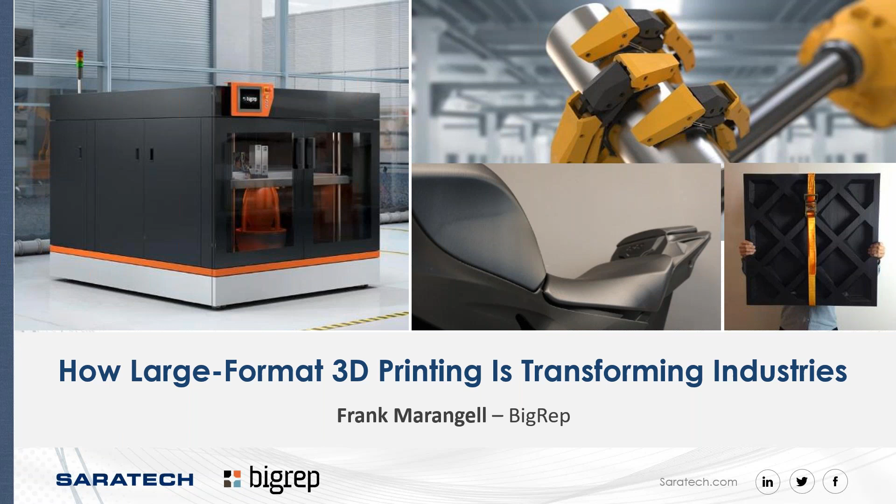Today we have a special guest from BigRep, Mr. Frank Marangell. He will be sharing with us some insights into how companies in various industries are using 3D printing to change the game today. Frank will also highlight a few case studies of customers who use 3D printing to speed up development and cut production costs. There's a lot of cool information to share with you today.

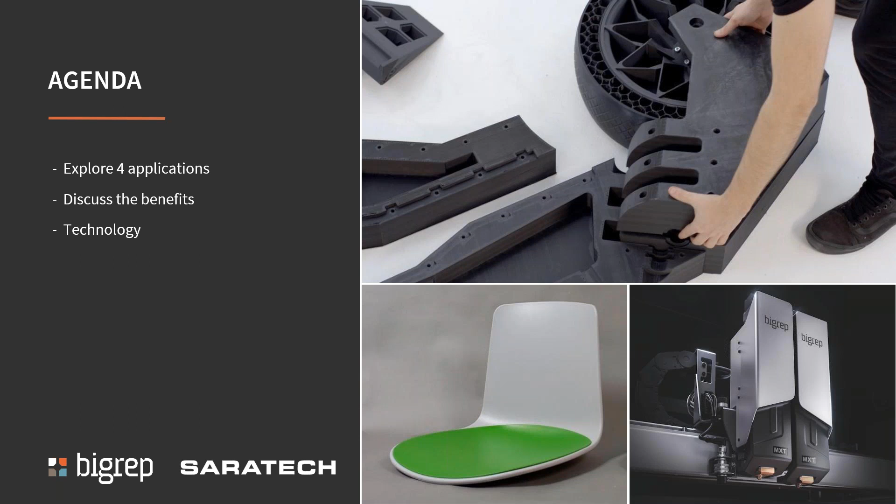On the BigRep agenda, we're going to explore the 4 main applications for large format 3D printing and a few customer use cases for each of those applications and the benefits those customers get out of those use cases. It's really exciting to see how our customers are using large format 3D printing, the BigRep 3D printers. At the end, it's not a sales pitch, but I have a couple slides just for anybody that doesn't know BigRep about some of our most exciting recent technology.

The first thing that is really interesting and what keeps me excited about this industry is that 3D printing is all around us. You can't touch something today that wasn't affected by 3D printing, whether it be the design or the manufacturing of it, or from a safety standpoint, 3D printing is getting into medical and dental. So 3D printing is all around us, and it's a really exciting industry. It's 30 years old, but it really feels like it's just beginning. Some of the applications we'll talk about today really emphasize how it's still growing strong and it's still in its early stages of development. It's very exciting. Next.

I put this slide in just to show that the industry, although 30 years old, has grown, has doubled over the last 5 years from 2014 to 2019, and is expected to double again by the time 2025 comes along. So it's really interesting. Now, if manufacturing takes off in additive, these numbers will even be blown out of the roof. The 3D printing industry is some version of $8 to $12 billion total, and manufacturing is something in the tens of trillions of dollars. So it's really an exponential factor from one to the other. If 3D printing can take a piece of that, it's very exciting.

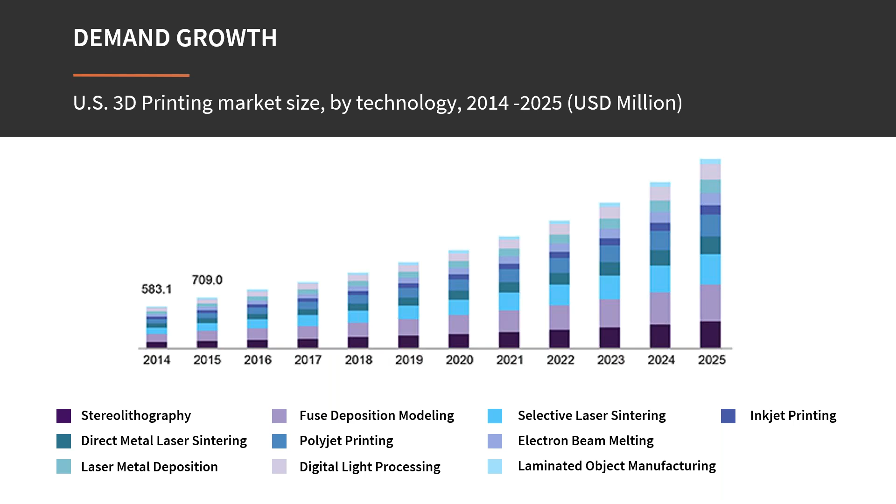One of the questions I get all the time from people that want to get into 3D printing is where do I start? What do I print first? Hopefully this presentation can give you some ideas. If you're in mechanical design, we have some applications in that regard - manufacturing tooling, end-use parts, and if you want to be bold, patterns and molds. We have many applications here, and hopefully this can help you think about different places where 3D printing might fit in your facilities.

The four main applications for large format thermoplastic 3D printing are prototyping, which is 60% of this market, and tooling - manufacturing tooling - which is about another 20%. So 80% of large format 3D printing today is in prototyping and manufacturing tooling.

One of the most exciting growth areas right now is patterns, molds, and castings, and we have an application on that, talking about that marketplace. The real holy grail of this industry, where it's going to grow exponentially, is in end-use parts. Today it's a very small percentage of the total market, but has the potential to be a traditional accepted manufacturing process like molding, milling, casting, forming, and additive manufacturing. You see some applications starting to take off right now, and we have a couple examples. So let's get started.

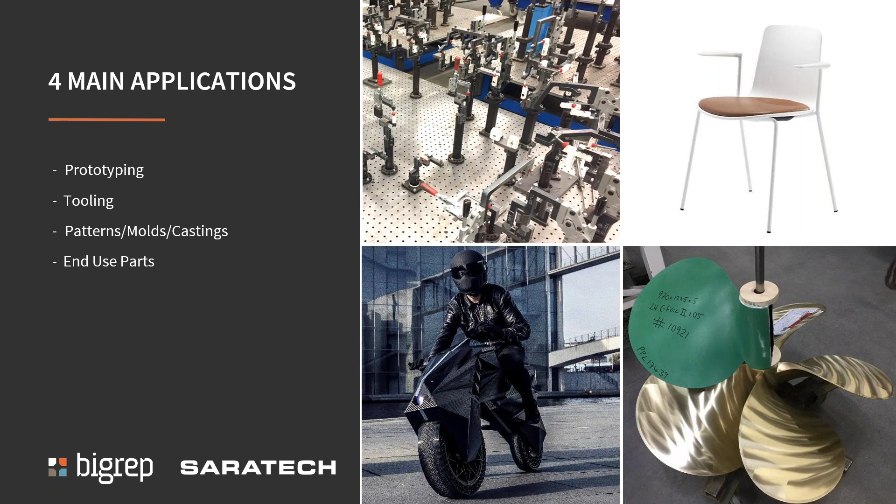The first application is prototyping.

The first thing you have to think about when you want to do prototyping is: what do I want to prototype? What's the size of the part I want to prototype? That's the first calculation to help you decide what machine you might want to use. Then you have to determine: do I want to do concept modeling or functional modeling? Each of those characteristics leads you down a different path - either different systems because of different specifications, or different materials and material properties because of what you want to do with your prototype. Let's look at those three criteria next.

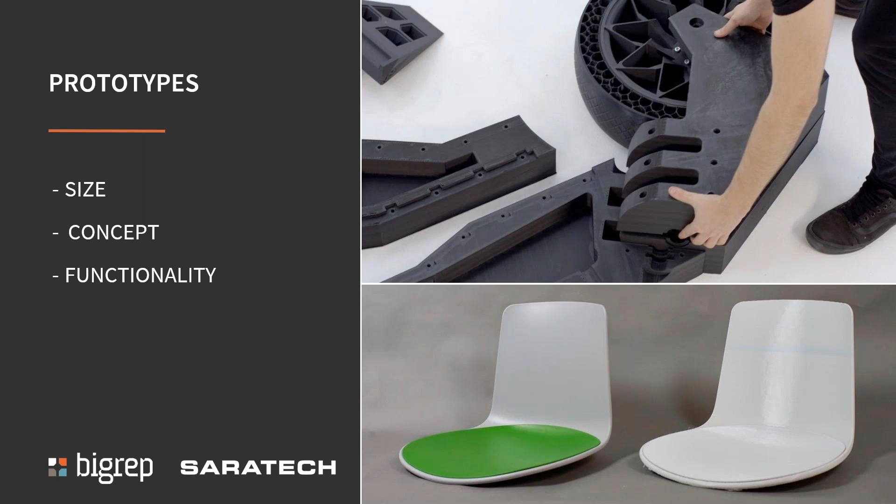The first one was size, and size is important in 3D printing - that's why large scale is really growing, because previously, before companies like BigRep, there wasn't an ability to print at very large scale. So everybody that wanted to make an additive prototype printed it in pieces, meaning they needed to take the CAD data, slice it up, print it in pieces, then glue it together - which caused a great increase in time, but also a reduction of geometric accuracy and physical strength.

With the ability to print the entire piece in one print, you're able to retain your geometric accuracy and make an easier print - you just load it onto the print bed, push print, and you're also able to get full mechanical properties out of the printer.

This particular printer, the orange bed above, is the top view of the BigRep 1. It's one of the first, and has the largest volume of serial production for large-scale 3D printing. There are somewhere near 400 printers in the marketplace of the BigRep 1. Its first generation came out in 2014 - we're now on the third version of the third generation. So it really is our flagship.

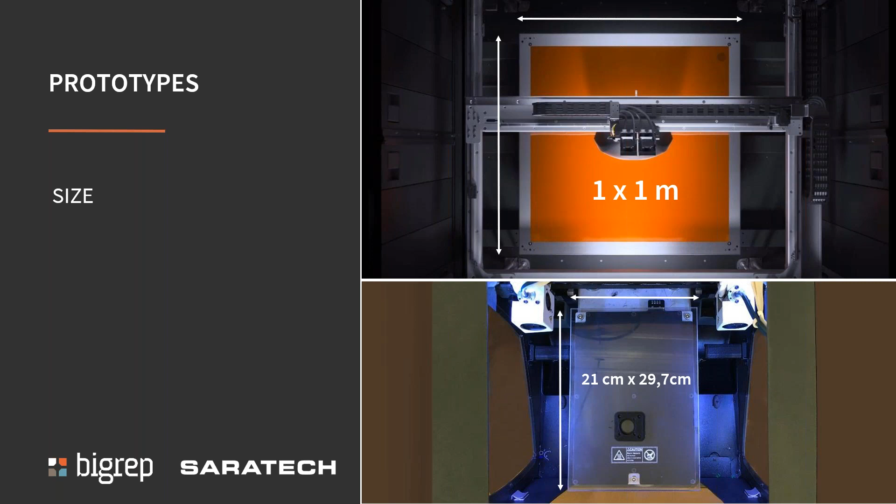The particular bed size we're looking at is 1 meter square and 1 meter in the Z, so it's a print area of 1 meter cubed. Very few things need to be printed larger than that - we do get those, but very rarely. Most times customers are very happy with the 1 meter cube being big enough for everything they want to print.

Then, like I mentioned earlier, you want to decide: do you want to do concept modeling, or do you want to do functional modeling? Both give the benefit of accelerating the product development process. What does that mean? It means you can either get to market faster, or produce and test more iterations - or you can do both, and most companies do both.

You're able to iterate much faster when you have a prototype that comes off and you can test it and say, 'I want to change this' or 'this is not what I expected.' And you also can get to market faster.

If you had to go outside or use traditional technology, you're not able to do that. And both processes reduce costs compared to the more traditional technologies. So that's prototyping with additive manufacturing in general.

Now, if you're doing just concept modeling, you're really just worried about form and fit. So the particular material properties are not important. You care about geometric accuracy, surface finish, form and fit, but you don't really want to use it in a functional way, so you don't worry about the mechanical properties.

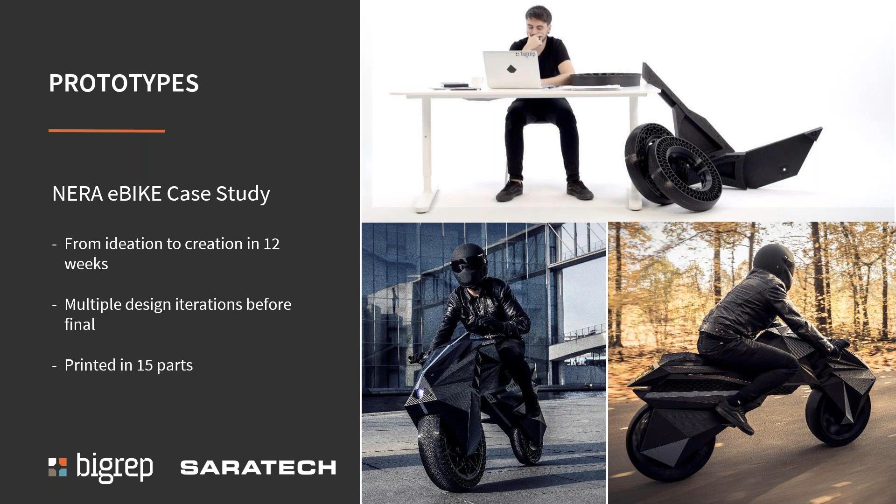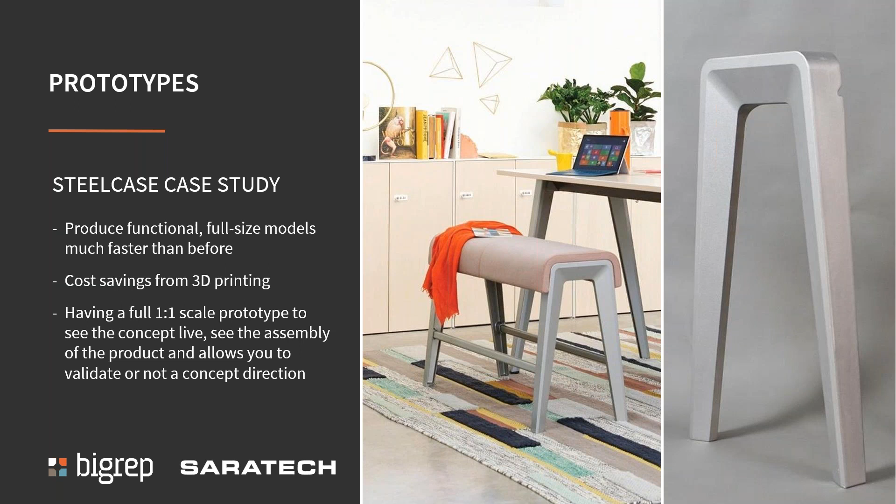And again, when you're the leader, when you're the best, you want to make sure you get to market properly. They actually had such success from their original one that they put a BigRep One in all their manufacturing sites around the world.

And here's a quote that I put into the presentation from Michael Hell, the director of design. I really can't say it better than Michael did. And I think it's indicative of 3D printing in general. So let me read it.

It says, one of the things that's really amazing about BigRep is that you can create full-scale models. It's important because you don't really understand what a piece of furniture means in the real world until you have it in full size. And I think that's true in so many industries. And that's why, as I mentioned, BigRep is growing faster than the marketplace. So thank you for that quote, Michael, and thank you for your customer references.

So that's prototyping. The next application for large format 3D printing is tooling, or as I say, manufacturing tooling. Let's look at a few case studies here. Next.

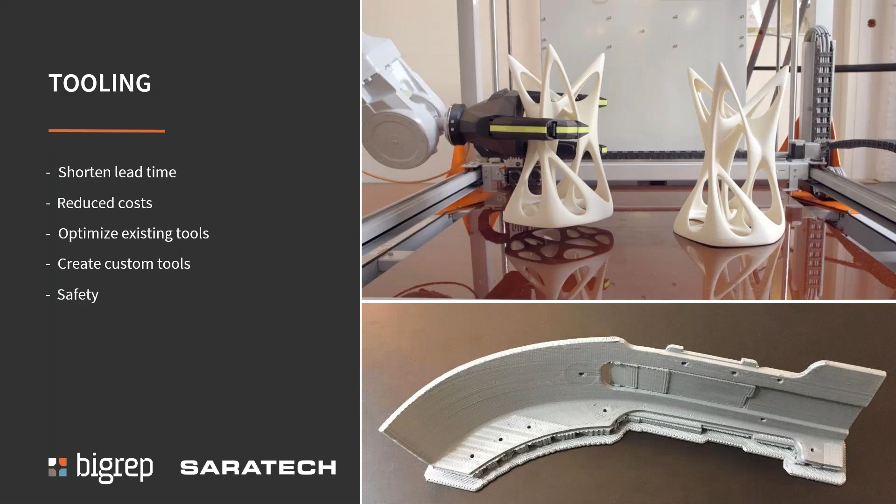Tooling is 20% of the thermoplastic extrusion marketplace, and it's one of the most exciting areas in market applications because customers are coming up with new and exciting tools every day. When a customer buys a system for one application, it's quickly overcome by many applications. That's why many customers buy one machine and within a year or two need to buy a second and third, mostly for tooling.

Tooling allows you to create your production line before you actually have a sample prototype. That used to be a big problem in the marketplace, you needed a prototype before you could start making tools, so you couldn't test your manufacturing line while creating your prototypes. Now, using CAD data to create tools and 3D printing to create jigs, fixtures, and custom trays, you're able to test your manufacturing line during the prototype process, not the main production.

Additive gives you the ability to make a lighter weight tool, so ergonomically it's better, and it allows you to make a higher quality product because of the customization. In areas where you might have had defects before, you can create a manufacturing tool that better aids the manufacturing process to create fewer defects. There's also a definite safety factor - if you need a shield or protection for the operator, you can make a custom shield or tool for that. And from a quality standpoint, you're able to create tools, trays, jigs, and fixtures that allow you to make a higher quality product.

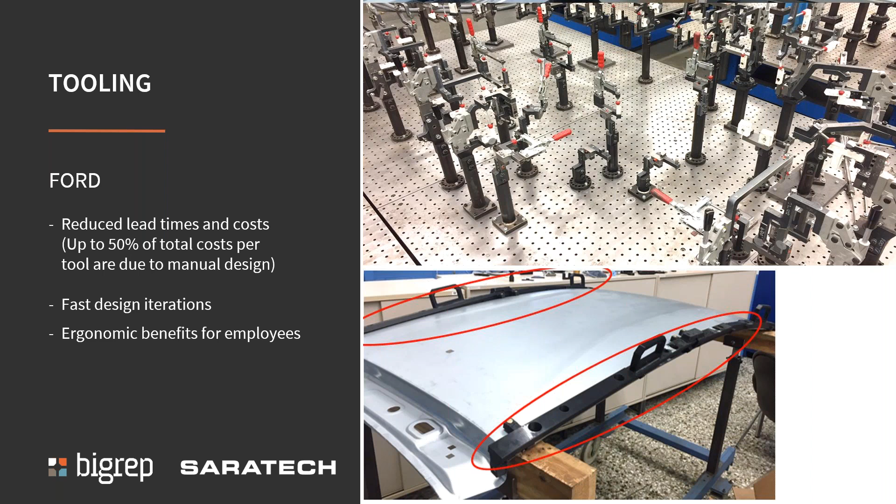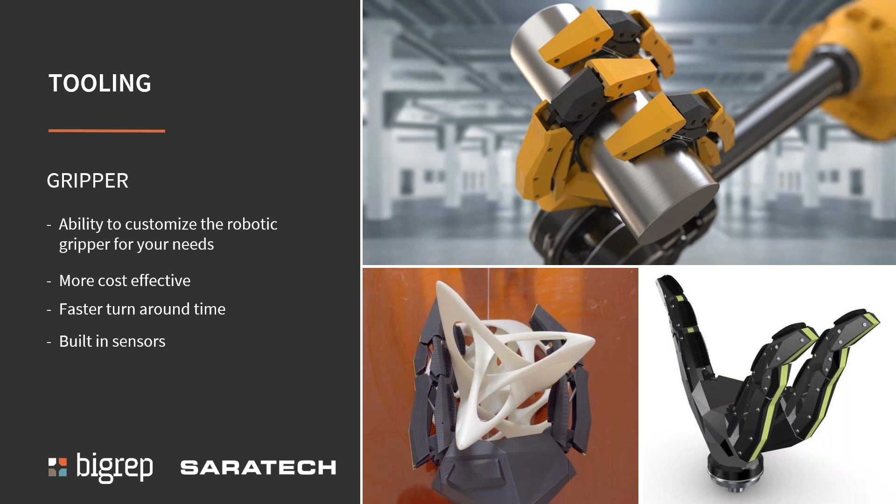This particular one has built-in sensors, so you can add some intelligence to the gripper to allow the robot to feel and sense it. Here's an example of the ABB robot in our facility using one of these sensor grippers, picking up a part off of the BigRep One and placing it. It's a really interesting application if you have any robotics to make a custom gripper.

So the next application for large format 3D printing is patterns, castings, and molds. I put the three together, and let's look at a few of those case studies.

The first thing from the patterns, castings, and molds area—it's an area that hasn't seen as much 3D printing as other applications. It's really interesting when customers come up to us and say, how can 3D printing help me? It reminds me of 3D printing a decade or more ago, when not everybody knew the benefits of 3D printing. Sometimes in the molding or casting business, it feels the same. But as 3D printing did in prototyping previously, the pattern business allows them to shorten the lead time, reduce the cost, and reduce both the labor hours and expertise, as you'll see in some of these applications.

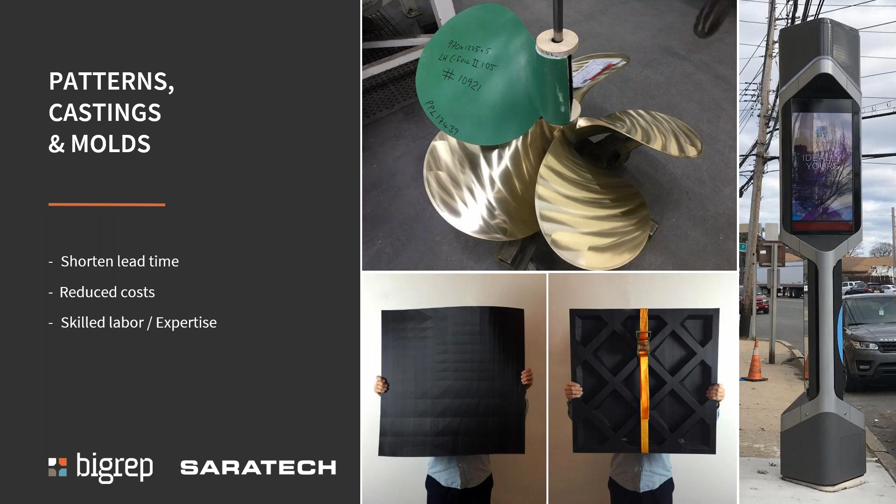The first application is vacuum forming. This is a customer of ours in New York called Boyce Technologies. They were a fixed subtractive company—they have 35 Hurco CNC machines, and a built-in electronic shop with printed circuit boards. Time is of their essence, and they were not convinced they needed additive at all.

But one of the applications they implemented once they bought the BigRep printer is quite interesting—they didn't buy it for the vacuum forming application. This is another area where they saw the benefit of using it in other applications inside their factory floor. Now they make all of their patterns with their BigRep printer, and they're able to print it in a day or a weekend, as compared to several weeks lead time if they went outside, or many more labor hours if they used their CNC machine or other technologies in-house. So it's a big benefit, and now they make all their tools on the BigRep printer.

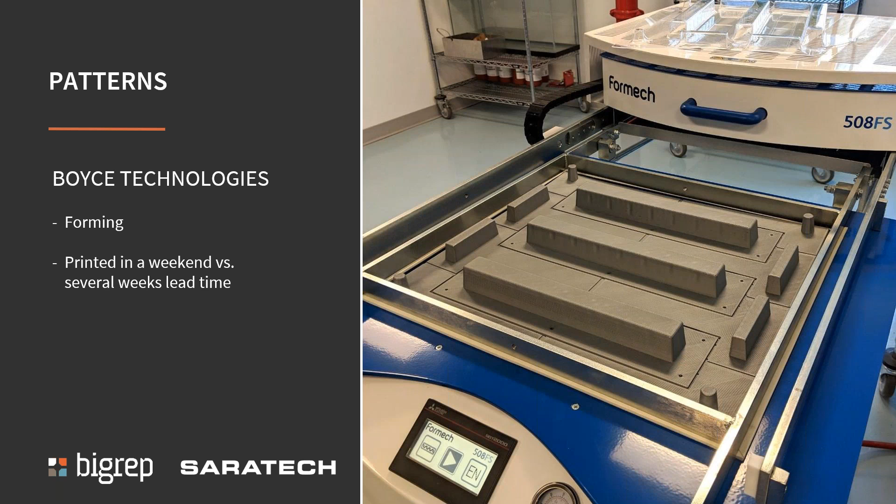A really interesting case study is Teignbridge. They are a propeller manufacturer, as you see here in the pictures, in the UK. They were posed with several problems—probably the biggest is the inability of people to make their patterns. Their pattern became an art form, and their ability to find that type of artist to make these patterns became a real shortage for them. They were almost forced to go offshore, not necessarily because of labor costs, but because of their inability to make their patterns. So they brought in the BigRep printer, and you can see their propellers are quite large.

They were able to print their patterns in 33% less time, and as you look at the next point, a 90% reduction in pattern maker labor. So instead of making it in an old artistic way, they were able to make it digitally, saving 90% of the pattern making time while making it more accurate as well. Probably the biggest benefit is their ability to hire digital engineers to design patterns instead of artists they can no longer find.

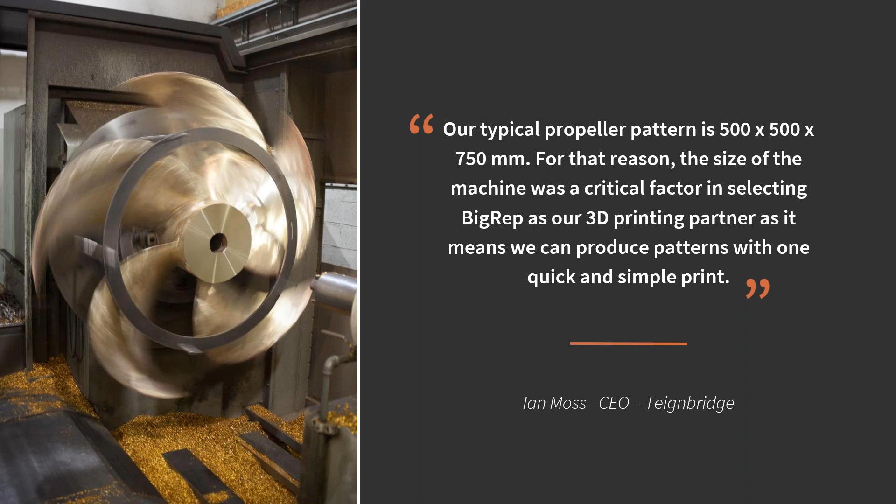So next is patterns, and this is a concrete mold case study by Geiger, also on our website if you want to read more. Geiger had the challenge of renovating a museum, and one of the things they needed to replace were concrete arches that were crumbling. Typically they would make these manually, a very time-consuming process, replacing them often because they were made out of plywood and got destroyed on each mold they poured.

So they decided to go additive and partner with BigRep, who used its partnership with BASF to create the best material for making these concrete molds so they could be used more often—enough strength to support the concrete, but enough release to allow it to be removed and reused. This project created a 50% cost savings over their alternate technology, 45% shorter production time, and really reduced resources all along.

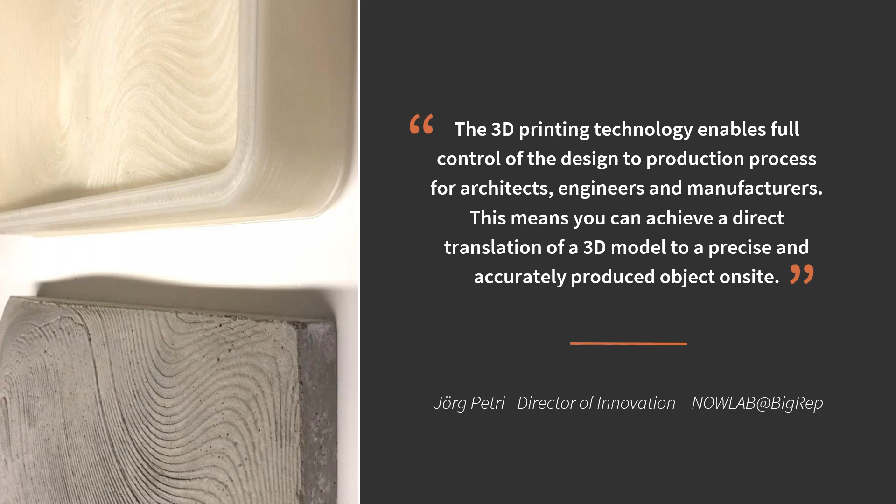What he said, which is true in many other applications, is that 3D printing allows full control of the design-to-production process. In this case, architects, engineers, and manufacturers achieve a direct translation of a 3D model to a precise and accurate produced object on site. That's true in so many applications, as I mentioned with the Steelcase quote. The flexibility of additive, especially large format additive, goes from prototyping to concrete molds. Quite interesting. Next.

Now the most exciting future potential—everybody's been talking about end-use parts for additive, and now you're actually hearing about applications for end-use parts usage. I'll show you a couple here, but it's really interesting. As I mentioned earlier, if end-use parts becomes a legitimate alternative to molding, casting, and forming—additive as a real alternative—our industry is going to grow rapidly, and manufacturing is going to have a lot more flexibility.

So end-use parts, like every other use of additive, allow for customization, help you deal with small and large batch sizes, and allow you to manufacture near the customer. You can design it in one place and manufacture it anywhere in the world—very interesting. There's much less material waste than in a lot of manufacturing processes. If you think about this part printed on our BigRep Studio, and you think about milling that instead, you're probably milling away 80% of the material. So it's really a waste. For all those reasons, end-use parts are really interesting.

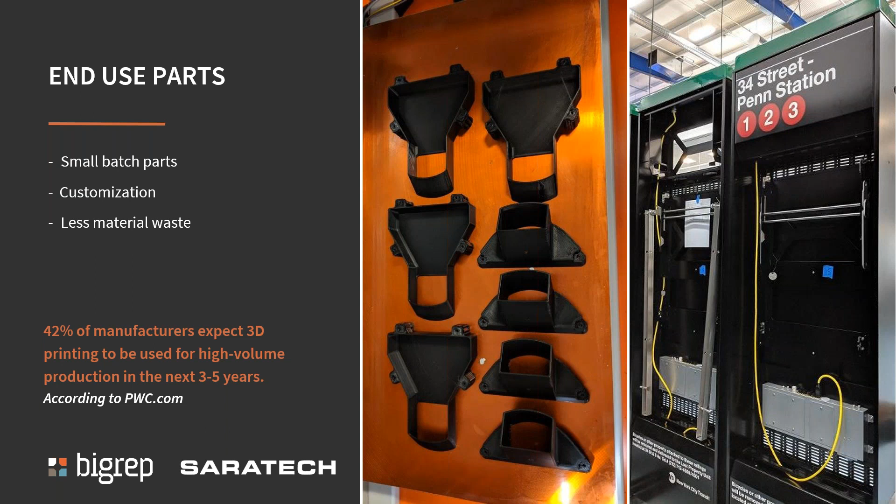I put this quote from PricewaterhouseCoopers in there because it's a very aggressive quote, and we'd be really excited if it became a reality: 42% of manufacturers expect 3D printing to be used for high volume production in the next 3 to 5 years. I do believe 42% of manufacturers will be using 3D printers or more for production volume. The question is how much high volume, and some new technology I'll present will help that process along, making the traditional-versus-additive decision a little easier. So wait for that. Next.

Back to Boyce Technologies for a second. As I mentioned, Boyce is a multi-million-dollar facility. They actually bought the printer for prototyping, then found that these parts were withstanding the criteria needed for an end-use part. So rather than using them just for prototyping, they ended up using them for real end-use parts. Boyce really sells time—being able to make an end-use part without having to design it, prototype it, and go out for tooling saves on the real cost of time, which is even more than the cost of the tool. Their ability to save time by using additive lets them take on a lot of projects, mostly for the communication industry. You'll see their kiosks and displays all around New York City and many major cities, and some of those have BigRep parts in them for real end-use parts.

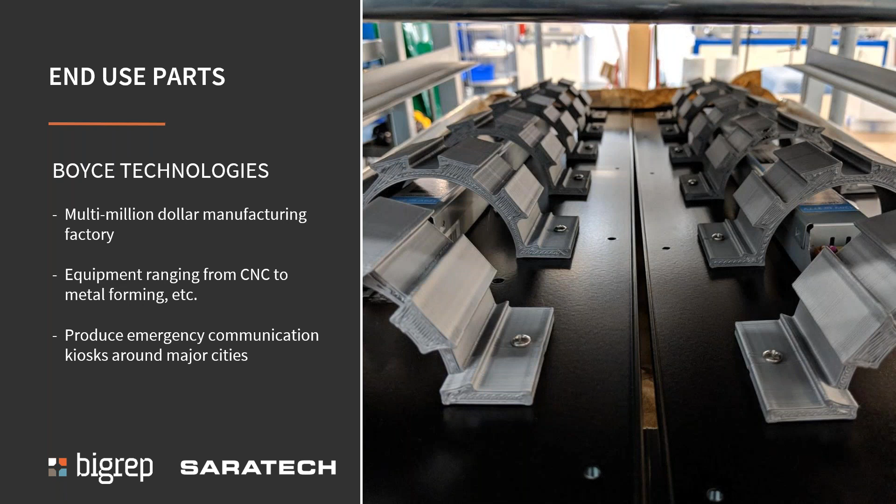It's just interesting to see how Boyce really is using additive in an end-use part application, and really saving them time and money. It really came to me that there's going to be a race for this end-use part marketplace, and I'm not sure if it's going to be the Fords of the world and the large manufacturers.

We have a partnership with Etihad Airways, and they want to print 50% of their cabin interior by the year 2025. That's a really aggressive challenge, and we're up for the partnership and challenge with them - Ford Motor Company and some of their challenges - or it's the Boyce Technology of the world that are already using it for end-use parts today.

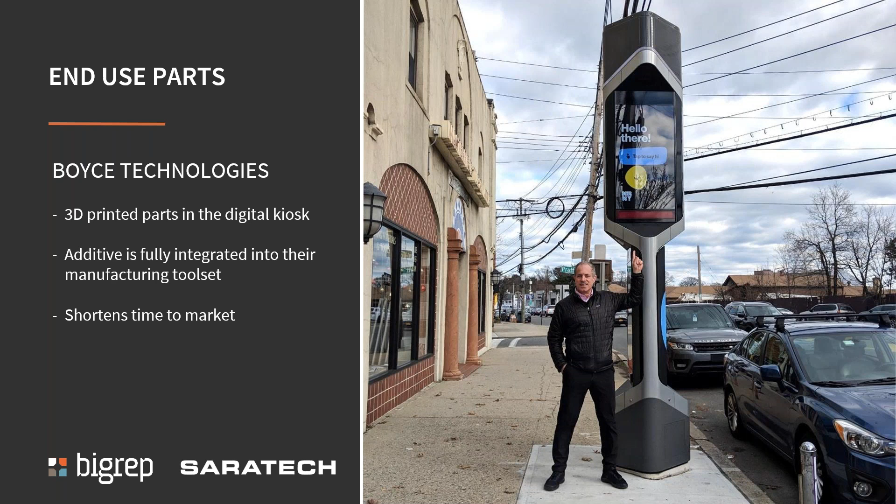There are thousands and thousands of Boyce Technologies wherever you are in the world. You might be one of them, ready to implement additive for real end-use parts. And if you are, and if it's large format thermoplastic extrusion, please give us a call. That's my sales pitch. Next.

So it's really a question of now looking at those applications - prototyping, tooling, patterns, castings, molds, end-use parts. What application do you want to redefine? And if you look at the slogan behind me, BigRep - one of our brand messages is to redefine additive, and we hope we can help you redefine additive.

Let us know if any of those applications, or if we can solve an application for you. I don't know who's on the line, it's really interesting, but I don't know how much you know about BigRep. So I just have a few slides that talk about BigRep Technology, not BigRep as a company.

Came out in 2014. In 2017, we introduced the Studio - it's our little guy, as we talk about it. It is 1 meter by half a meter by half a meter, and it fits in a lot of applications and places in the factory. It's quite silent, so it fits in an office environment as well. So really a nice form factor, both in printing area and size, for people who don't need the BigRep One.

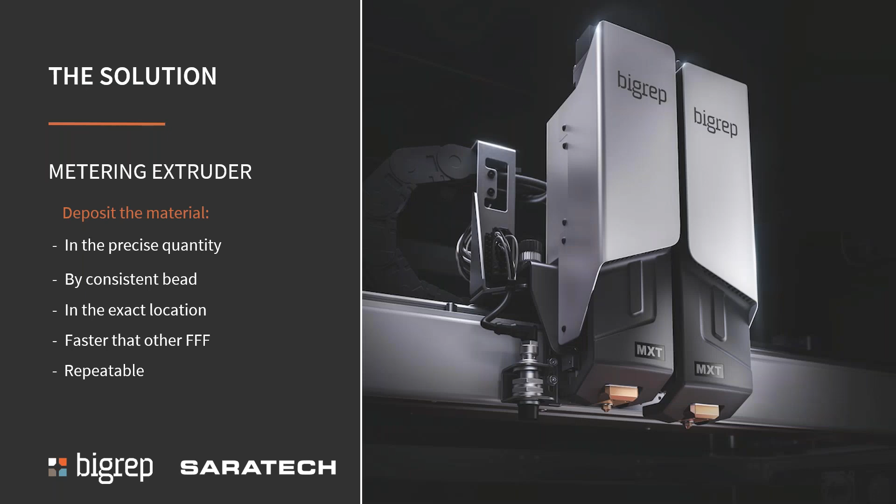On the Pro and the Edge, we introduced a revolutionary new extruder - we coined it the metering extruder, or MXT. Today's traditional extruders, ours and everyone else's, even the $500,000 solutions on the marketplace, are still like a hot glue gun that you try to control a drool. That's just it. I'm amazed that we're able to make as accurate a part as we are when trying to control molten plastic. It's very difficult, always a balance between a molten pool, controlling the drool, geometric accuracy, and speed. The metering extruder actually takes a lot of those limitations out of the extrusion process by separating the thermal process.

So we actually drive the filament into a reservoir, and then we use a positive displacement pump, and we grab the material voxel by voxel and place it down on the part on the bed when we want it, where we want it, the exact amount we want it. We can start and stop whenever we need to, so there is very little drool at the end of the nozzle that is outside of this pump process.